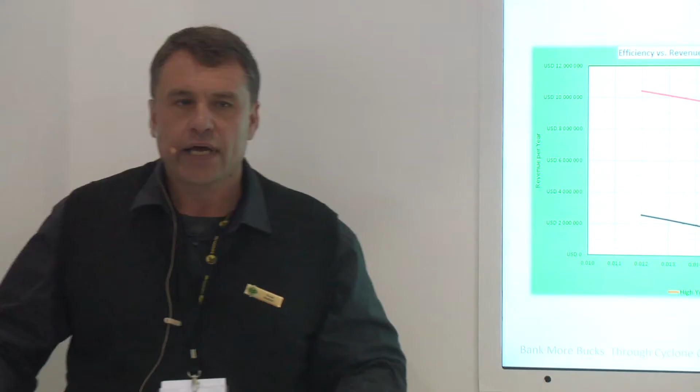These two lines represent an ore body, which is a good ore body, a high yield type of ore body, and the black line, an ore body that does not yield a lot of coal. The point is that if you start to experience inefficiency, the revenue per year that mine experiences can decrease quite significantly. If you've got a low yield ore body, you can go into bankruptcy if you're not careful. And it's not very difficult to get in this territory. And that is where we as suppliers need to be experienced enough so that we can help our clients.

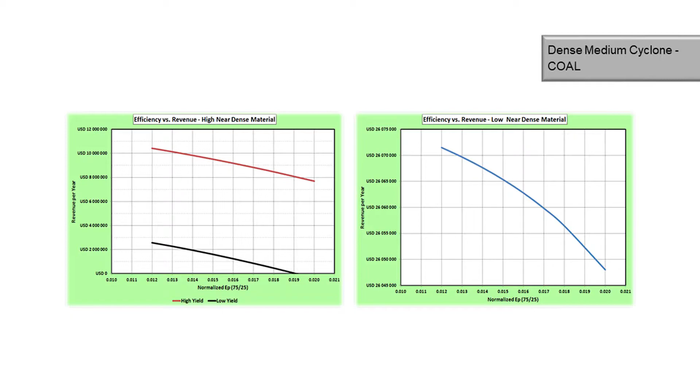On your right-hand side, this is for an ore body that is simple to separate, an easy to separate type of process. You don't see that significant reduction in revenue, but still you see a reduction. And we as suppliers, but you as metallurgists, both of us have got a responsibility to beneficiate our ore bodies as efficiently as possible. That was on revenue.

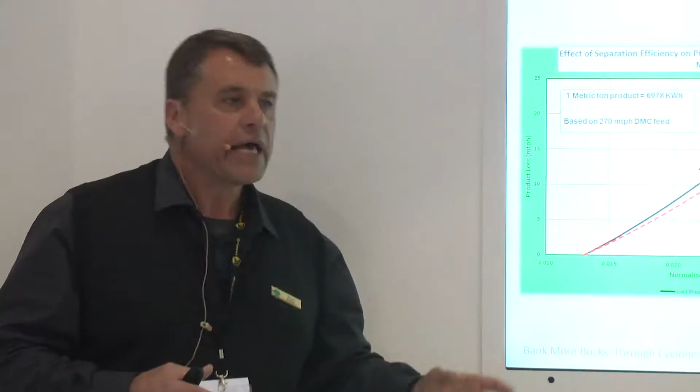As the efficiencies start to deteriorate, in coal, we are misplacing coal in the wrong direction. It does not only represent money, it also represents energy. So this black line illustrates the amount of tons of coal that we are throwing away. And this is only on a 270 ton an hour coal processing plant. So we're talking relatively small scale, but the impact is significant. The red line is the associated energy. And again, the metallurgist, if you've gone to this point, will say, okay, we're losing energy.

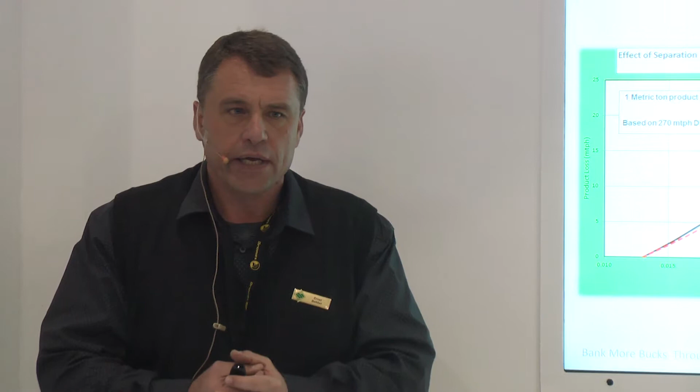But that's not good enough, because we have a responsibility to the social environment as well. That energy that we are throwing away is enough to give this amount of people energy. So we are throwing away coal, we're throwing away money, and we are depriving the social environment of energy. That is not how we should operate our business. That was now in coal.

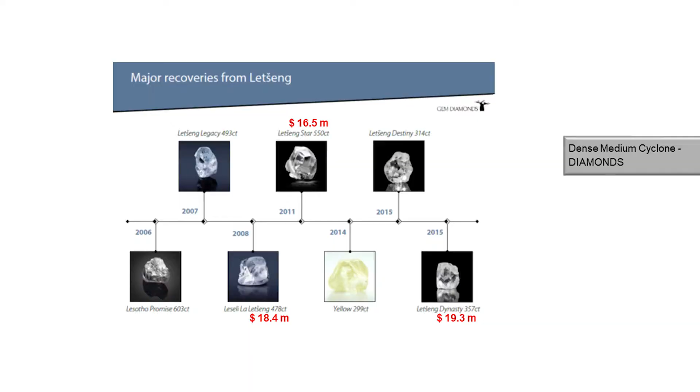Another example of dense medium is on diamonds. This diamond plant sits in Lesotho, and it is renowned for producing some of the largest diamonds in the world. Very good quality and therefore very expensive. These are some of the diamonds that were produced, as noted on the internet, and these were the values that the diamonds were sold for. And you think, well, okay, so what?

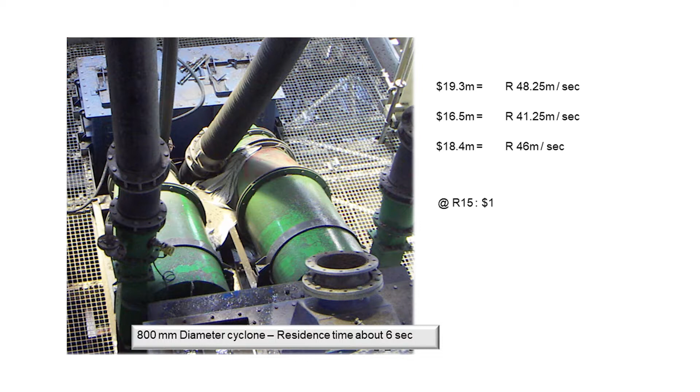It's a diamond. This diamond has gone through a dense medium process, and here are the dense medium cyclones. The time the particles spent inside this dense medium cyclone is a couple of seconds. The reality is that if you look at the value of the diamond and you divide it by the number of seconds that the particles spent inside the dense medium cyclone, every second the cyclone had to make a decision, and that's the value of that decision.

And that is why for us as suppliers, we must know our business, but it's also for us to transform, to give you guys, our clients, the knowledge to understand the impact that a simple device like this can have. If we don't know our business, we are going to push you in the wrong direction, and that is the impact that it can have.

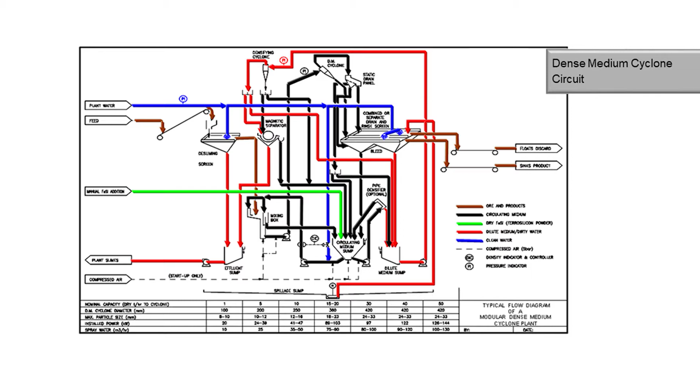The dense medium cyclone sits in the middle of a process. Here's the overall dense medium process. These different colored lines are different process streams inside the dense medium plant, and each one of these different color streams does impact on the dense medium cyclone. But these days people go on the internet, they get an idea of how the cyclone works, and then they're experts. But guess what?

On the internet, they only tell you how that unit operates. They will tell you how the screen operates. They tell you how the pump operates. But very seldom do they give you the complete picture. And that is our business. That's why we've got these training sessions that Brent Combrink was talking about earlier, to help you see the bigger picture. If you then want to optimize your dense medium cyclone, you start with the cyclone.

We inspect the cyclone. This is the easy part for the metallurgist and for ourselves. But then you need to step back and look at how the dense medium cyclone operates. What factors influence that performance? Once you're comfortable with the dense medium cyclone, your job is not done. You have to step further back and have a look at the overall process inside the plant, the feed rates, the size distribution, how auxiliary equipment is operated.

And once all this equipment is operating correctly, together with all the optimized items we've already covered, then you have optimized the dense medium process. And that is where we want to be. This was now on dense medium cyclones.

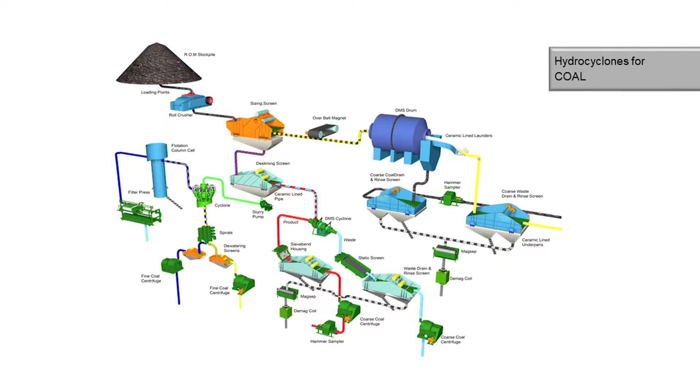On classification cyclones, which is a device that sits in this area, and around the corner is a typical hydrocyclone, the purpose of the classification cyclone is to separate fine particles from coarse particles. And very seldom do people pay attention to what impact that device can have. What happens when you separate the wrong size fractions in the wrong direction?

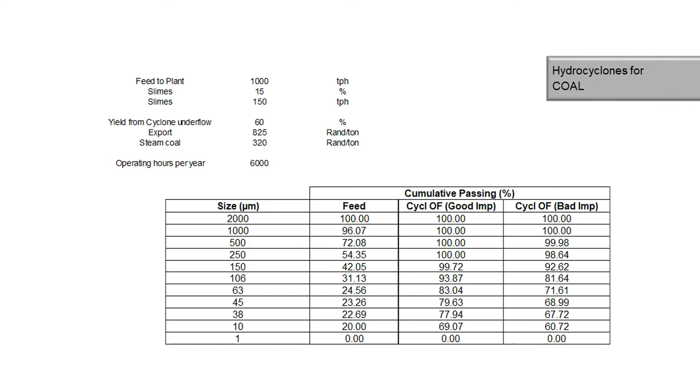This example is a plant that's treating 1,000 tons an hour. Only 15% is the fines that's going to go to this hydrocyclone. In this example, the cyclone underflow goes to a spiral device. That is an example of the spiral that's standing on my right-hand side, on your left-hand side. That's a spiral. You can recover 60% of that material.

If you allocate a value of either 825 Rand, if it's an export coal, or an Eskom coal that's only 320 Rand, what would the impact be? You only get a size distribution. The metallurgists get a size distribution, they give it to us. What do we make of this when you have a good size distribution or a poor size distribution? Because the reality is you don't know which one is good and which one is poor. We have to analyze the overall picture.

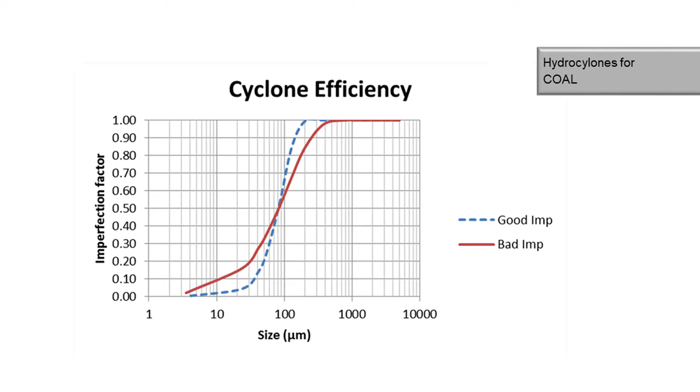This is what the size distribution would look like. You look at this and you say, okay, so what? The efficiency of the good cyclone would be the blue line, and the red line would be the lower efficiency. And that's where most of the people stop. They say, well, the cyclone is not operating correctly, or the efficiency is relatively poor, and they stop there. So go further. And that is what we are trying to help you with.

Because if you look at these two examples, your export scenario, which is your high value coal, if it's operating incorrectly or at a lower efficiency, you are losing in the region of 13 million Rand per year. That equates to about 64 cents per second. Again, we think it's small money, but add it together and the price starts to increase.

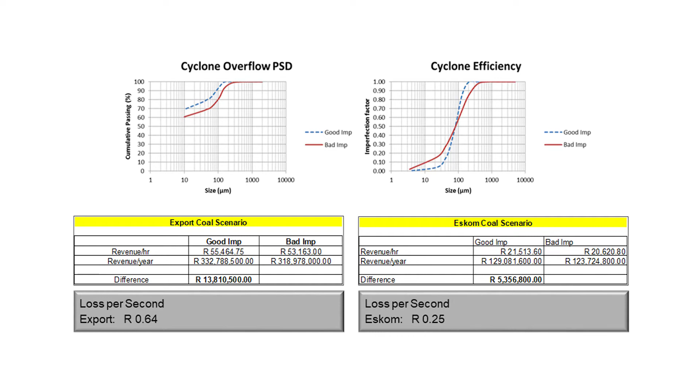If you look at the Eskom coal that one would presume is a low value product, you can still lose money. And in an environment like this today, it's our business and it's your duty to make sure that you maximize the performance of that equipment so that we can minimize these losses. This is on fine coal.

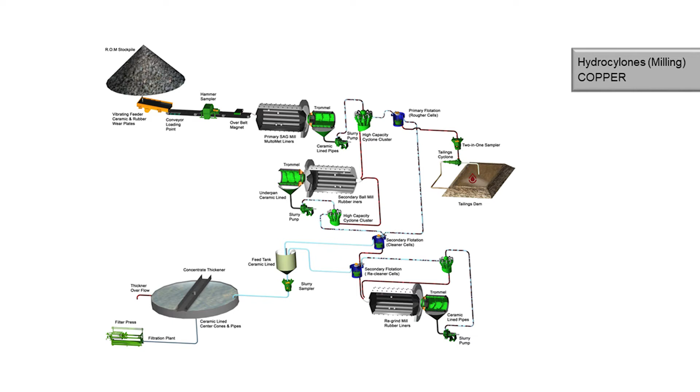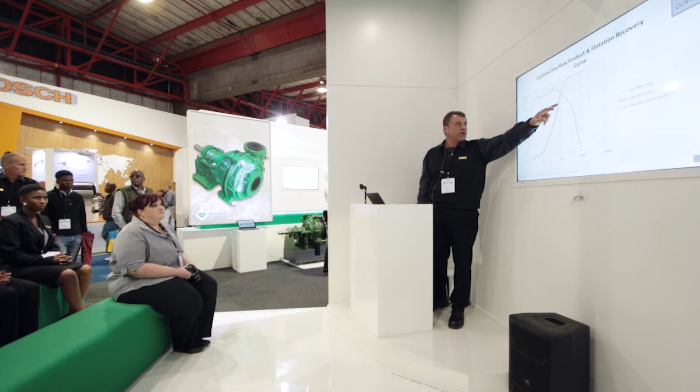What does that mean? We look at this result sometimes, okay, that's a curve, a small deviation, and that's it. Unfortunately, that's not the final story. There is more to this. This is the overflow size distribution of an efficient cyclone, and you've got the overflow size distribution of the less efficient cyclone. Again, you look at the data, and we say, okay, one is better than the other, or they're very similar. Think further, and that is what we are trying to help you with.

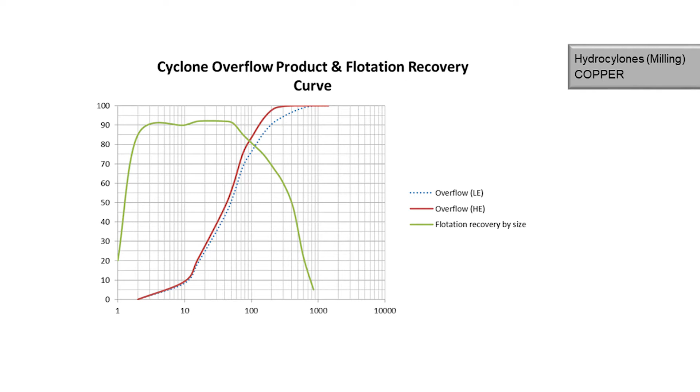If you look at the green line, which is the flotation recovery per particle size fraction, the best area for recovery on flotation is the size fractions up to maybe around 200 micron. The finer fractions and the very coarse fractions are not being recovered. What does that translate into? Because it's still only graphs.

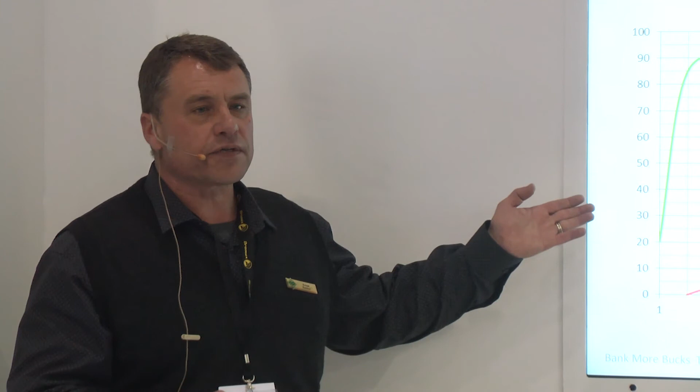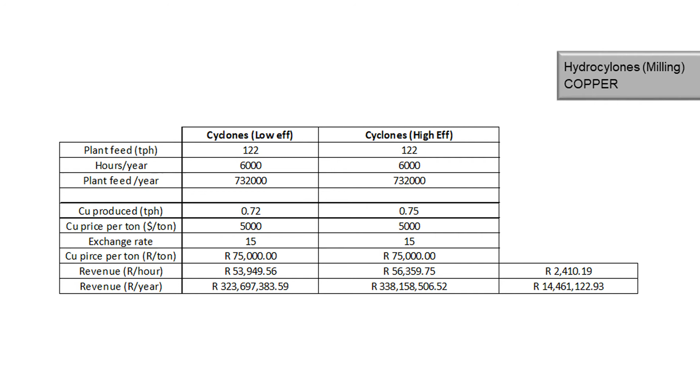If you look at the value, you're using a plant feed in this example of 122 tons of copper ore going to the process, 6,000 operating hours, there's the plant feed per year. There's the amount of copper that you produce, about 0.72 or 0.75. That small difference equates to quite a significant value, 2,410 rand per hour. That is on a 122 tons per hour plant. The bigger thing is 14 million rand per annum that you are losing purely because of a small deviation on the overflow of the hydrocyclone.

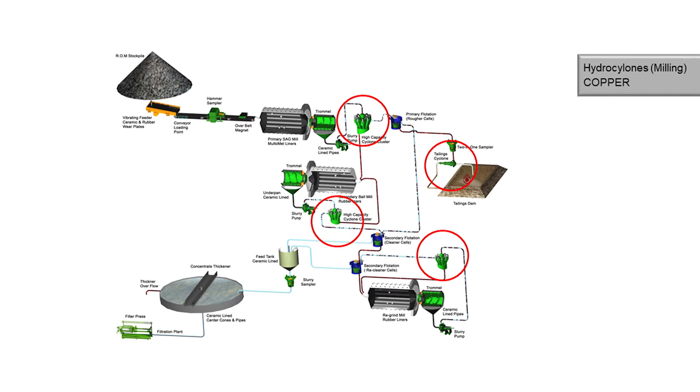The hydrocyclone is again forming part of other processes. There is equipment that is influencing the performance of that hydrocyclone. Again, you go onto the internet or you go to handbooks, they don't give you the bigger picture. So if you want to look at a hydrocyclone, you start with the hydrocyclone again. Look at what the unit internally looks like. Optimize it. You then start again, moving backwards. What is the flow behavior of this hydrocyclone? But when the hydrocyclone is operating correctly, it does not mean that the unit has been optimized. You have to look again at a bigger picture.

In this case, it is now around a milling circuit. When you're in a milling circuit, you have to understand how the mill operates. You need to understand what the effect of the grind and the cut point is. Looking at the sump level control, the auxiliary equipment, how's the flotation equipment performing? Maybe the flotation equipment is the equipment that's not operating correctly. And then looking at how the pumps are operating. And most importantly, mill feed rate and particle size distribution.

So this is a quick summary of the hydrocyclones and dense medium cyclones that are perceived to be quite simple. And our job is to take you from this high curve where you have limited experience and a lot of self-confidence and arrogance, bring you down to a level where you realize there's more to be learned, and then build you up to become experts.